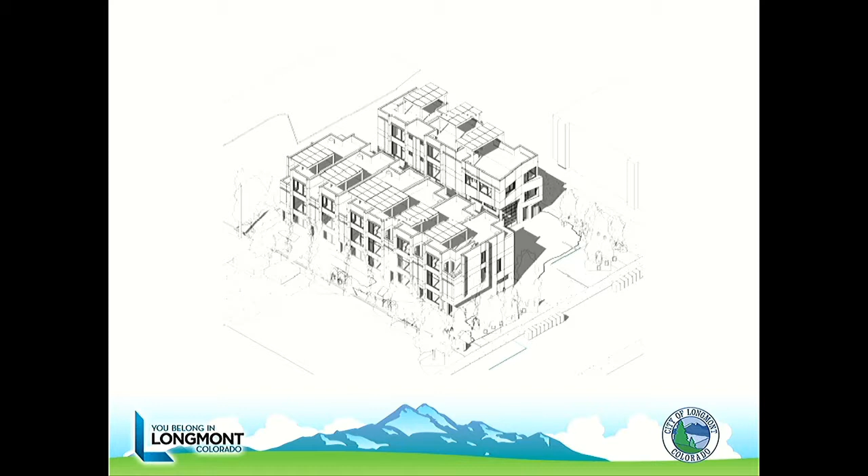For commercial developments adjacent to residential uses, a 20-foot landscape buffer is required, and they're required to be landscaped with 1 tree and 5 shrubs per 500 square feet. The applicant is proposing a 4-foot landscape buffer adjacent to a 3.5-foot walk to include 6 skyrocket junipers in the buffer. No shrubs are proposed in this buffer.

If built to meet code requirements, the landscape buffer would be 23 feet long by 20 feet wide for a total of 460 square feet. Total number of trees and shrubs required if built to code would be 1 tree and 5 shrubs.

The applicant is seeking a modification to the landscaping requirements based on the City of Longmont Land Development Code, modifications of infill development, redevelopment, and changes of use. The code reads as follows: the decision-making body may modify applicable scenic entryway overlay standards, mixed-use district standards, river, stream, and wetland setbacks, common open space, landscaping, off-street parking, and residential and non-residential design standards in this development code for infill development, redevelopment projects, or changes of use where the applicant demonstrates and the city determines that the modification of a standard is appropriate, desirable, or necessary and can be achieved without detriment to surrounding properties or neighborhoods.

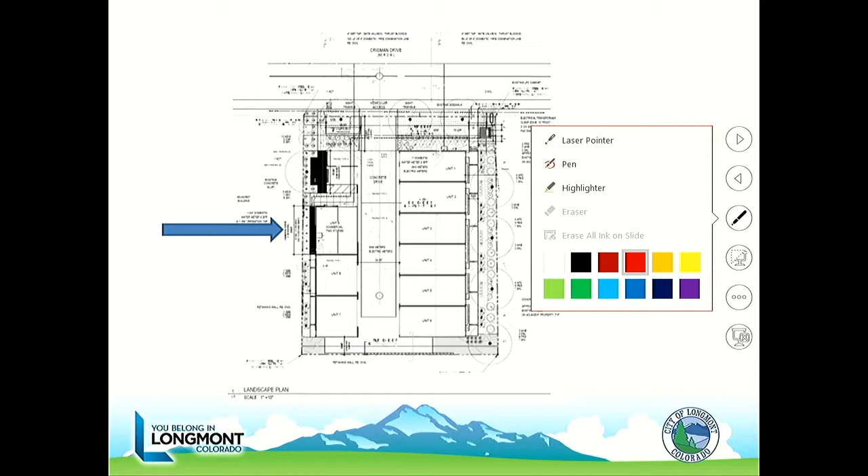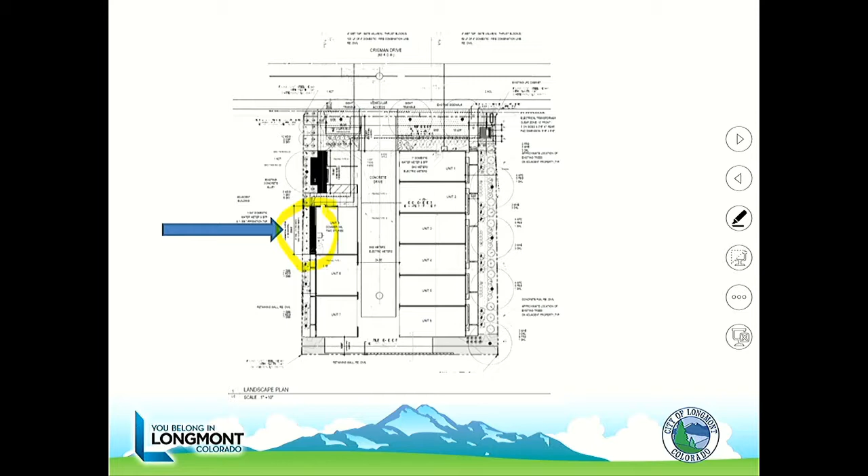So the blue arrow points to the commercial area of the landscape buffer in question. Let me just pull this up real quick. So it is this area in here. And so if the commercial space was residential, based on our current code, there would be no landscape buffer requirement adjacent to other residential. It's just something to consider.

A number of referral agencies were notified of the project. They're listed here: St. Vrain Valley School District, CenturyLink, Xcel Energy, Comcast, Parker Place Condominiums, and the Regional Transportation District. We only heard from Xcel Energy, and their response was that the developer has to complete the application process for any new gas service.

At the neighborhood meeting, there were 3 members of the public that attended. Questions ranged from pricing of the units, general layout of the proposed development, snow removal, whether pets would be allowed, and exterior materials. I don't recall hearing any negative comments associated with this project. Subsequent to mailing out notices of the development application to property owners within 1,000 feet of the subject property and then posting the property, staff received no comments from the public.

The Planning and Zoning Commission is the decision-making body for this application, and the choices for the commission are as follows: to approve the Mark II Crisman Condos conditional use site plan and modification to the landscaping standard without conditions, finding that the applicable review criteria have been met as reflected in PZR 2018-10A. The second option is to approve the conditional use site plan and modifications of the landscaping standard with conditions, finding that the applicable review criteria have generally been met, but require conditions of approval to fully comply with the criteria, as reflected in PZR 2018-10B.

So we're excited, we do cool work. That's what those were. Now onto this project.

So Ben kind of set us up where we're at. This is a newer picture with the other Crisman apartments, and this is one in color of what it looks like. We'll talk about the landscape buffer and show you kind of what we're doing and why we're doing it.

Some of the exterior materials—we're going for a more modern look. We're going to use stucco on the outside, then a nice Hardie board and black windows. We think that will look nice. Then board and batten for the commercial, and some stone to soften it up. We think that will also work nice.

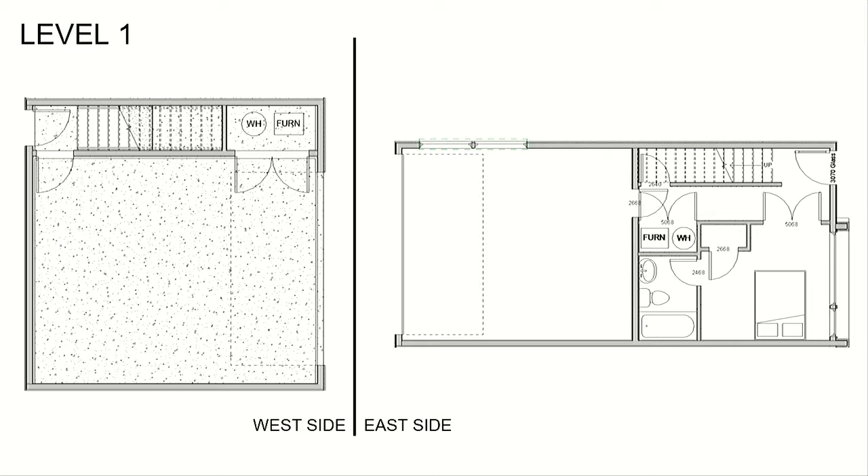So here's a floor plan. The floor plans probably don't matter for this meeting—this is my first time doing this. If you want me to talk about floor plans, I can, if you want to live here. I'm getting head shakes no, so I won't go into the floor plans.

But one of the cool things that I think is warranted in this project is that we will have a rooftop deck, and we think it'll be a great place for everyone. We designed this as if we're going to live here, not to do things weird, but to make sure we brought it up to the standard we wanted. So we'll have solar panels on there.

You can grow—this is a very diverse community. Lance is into growing gardens, so you can grow up there. And then gas-only fire, so it doesn't get out of control, so you can have a nice evening up there. Longmont and the mountains are such a beautiful place, so we wanted to take advantage of that. So there's the exterior.

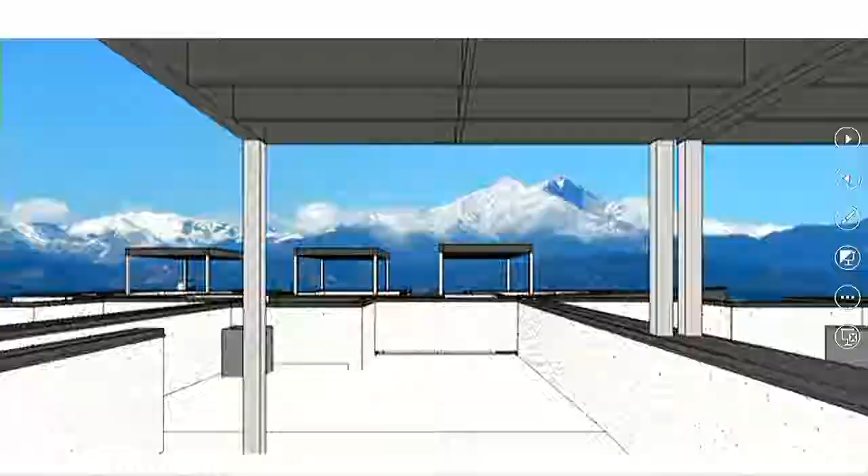Now, the review criteria of why we're here. The first two are—we're consistent with basically all the codes besides these two things we're talking about, same with the design standards, which is B. And number C, I think, is key: that we're consistent with the intent and purpose of the zoning. The timing of how the future code works out, I think, backs us up a little bit.

As you can see, the scale of what we're putting there is not really overpowering anything. Compared to the neighbors, it's a small site, so we need to fit in there. This is a commercial area, and one of the reasons it's been vacant for a long time is not only because it's on a side road, but the width is actually half the width of most of the other commercial areas.

So to make any sort of use work there, I don't even know what you'd put there—a Hardee's, probably not. An office space, you'd probably just have a whole bunch of parking in the front because you can't really get around it, especially with the buffers. If you had a 20-foot buffer, it's a difficult site. So to make this work, we combine commercial and residential.

So this is a picture of our lot. This is where the buildings would sit. And talking about the landscape buffer, our building, if you're looking at that screen, is on the right with the commercial. And what we're separating is the residents on the right with ours.

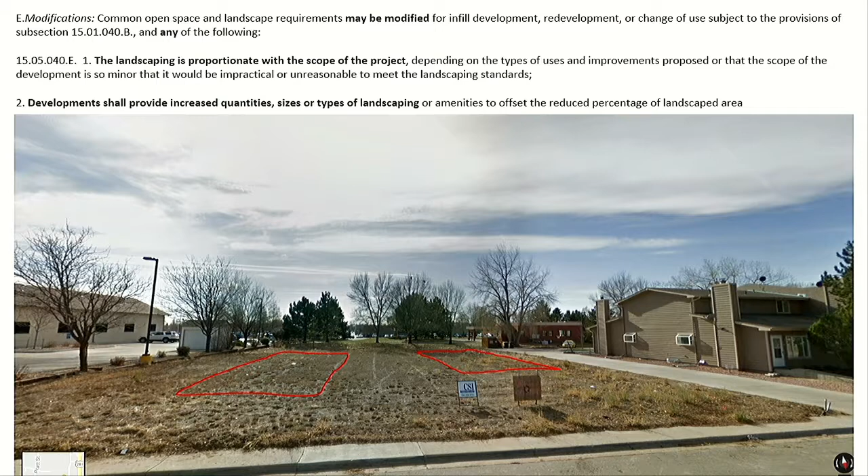We understand the purpose of a landscape buffer, especially if you're putting some sort of office building, you'd want some sort of buffer. What we did to mitigate that is bring the scale down. It's not a huge commercial structure there. It matches with the size of the residences and doesn't really overpower it.

The second thing we did, and this actually came from the review process, they have a landscape architect reviewing it, and he said why don't you put a bunch of juniper trees there so they would shoot up. We actually thought it was a really good idea because I'll show you a picture in a little bit. I think it's going to make for a cool look.

So basically what we are required to do is 1 tree and 5 shrubs in this area. Instead, what we did is we put 6 trees in there, but they're smaller.

Now if we talk about the code, in my interpretation, and trust me my interpretation is not always right, when you have a buffer, on the right side of the page there's a 10-foot buffer, and that's coming from the parking lot on an adjacent property because we're an infill site. So because they already built, we have to put a buffer on our property.

Now buffers, you have to have landscape in there, but obviously you could cross roads and pedestrians in there, that's allowed. So buffers may be interrupted by necessary pedestrian and vehicle access. So the only thing between us and that other building on our site is vehicle access.

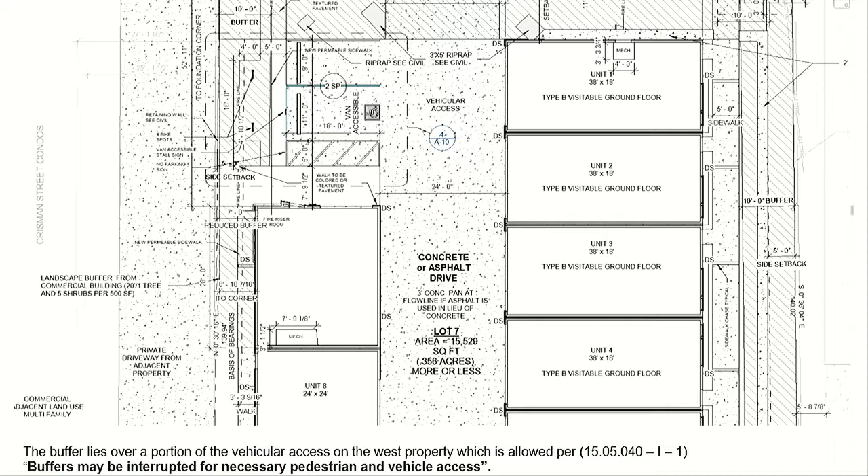Now this is sort of a tricky situation, and I think that's why the new codes came out. So let's go through the new codes. Here's a picture of what it's like without vegetation, and then here's what we're going to do.

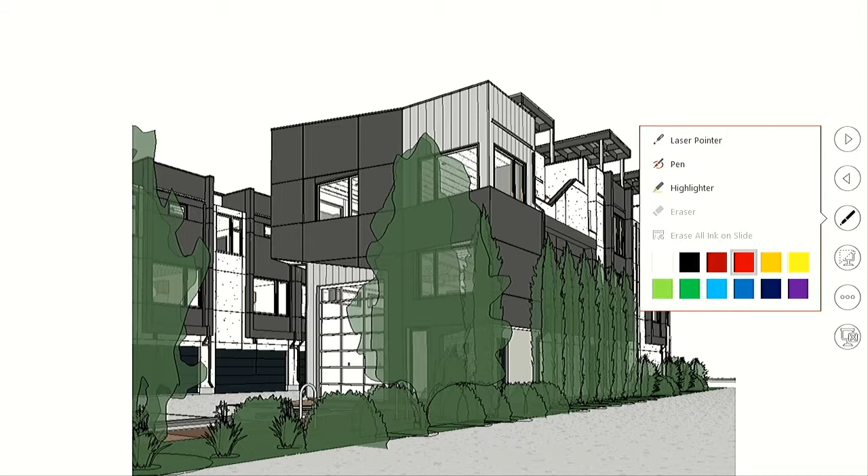So in front of the building, let me point this out. This 1 tree and 5 shrubs is normally what's required over here. But we actually think it looks better with these 6 skyrocketing junipers.

You'd have a nice feel walking through the space—you know, I'm an architect—walking through the space, it would feel really nice. I think it would look even better from their property and just enhance the neighborhood, actually.

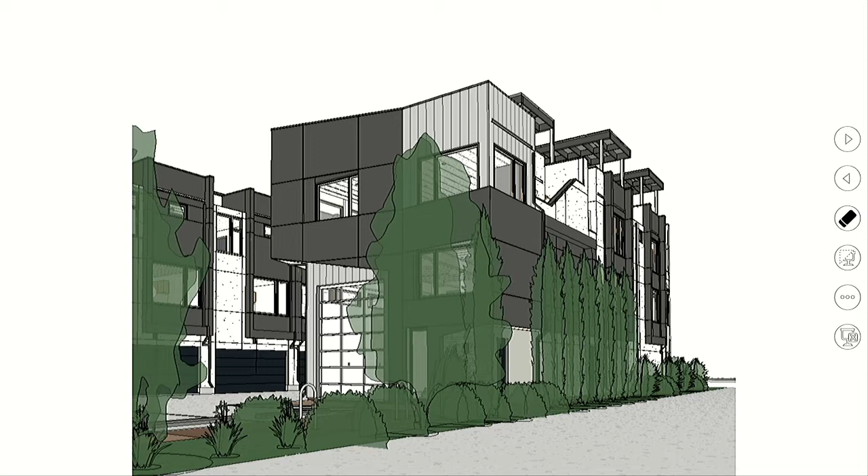So in that area, the buffer is the setback. So the future buffer would be 5 feet. We have 7 feet, 5 feet is fine. And that's what's saying that A is matching it.

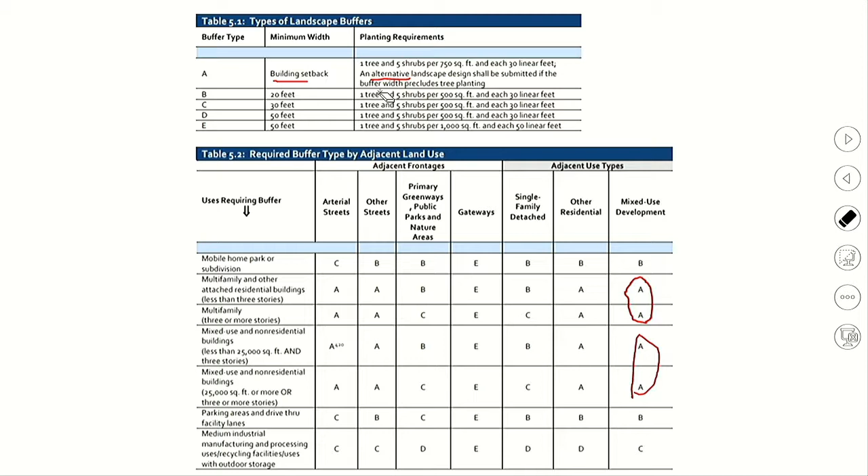And then an alternative landscape design shall be submitted if the buffer precludes tree plantings. So it's again giving that flexibility, the flexibility that Ben talked about with the codes, that there are these modifications for infill sites, because not everything's perfect in an infill site—you've got to work with whatever's around you and the width and what you've got.

And the city response is that it's proportionate with the scope of the project and increased quantities of landscaping. We also put a lot of trees and vegetation here because it's going to look really good.

The other review criteria is that it does not significantly adversely affect the surrounding properties. I don't think it does. I think it enhances it, especially because it's just a lot right now. And then the draining is the other issue too.

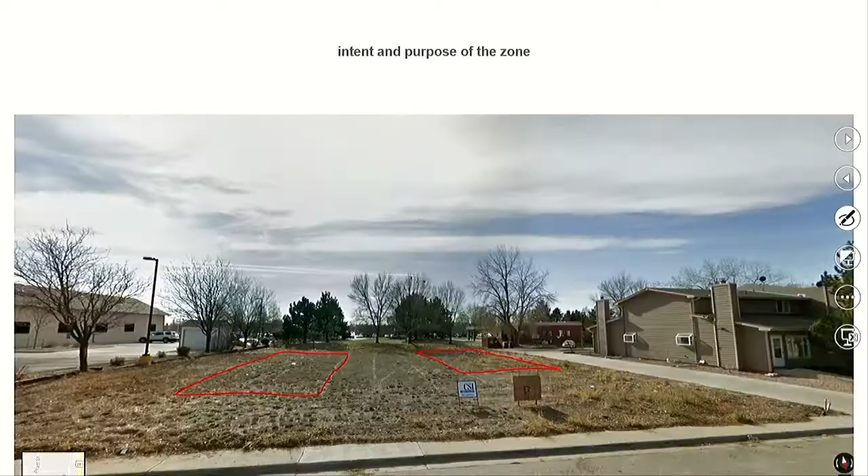Right back here is where a lot of our water flows, this way, normally without any of the buildings going there. And the problem is that down this way, everything kind of pools up, and it's not a great place.

So we had our engineers redesign it so that less than what is historical actually drains this way, and the majority of everything goes out this way. We're trying to improve it because we don't want bad neighbors, and we feel like it'd be terrible to add more water than what's already happening.

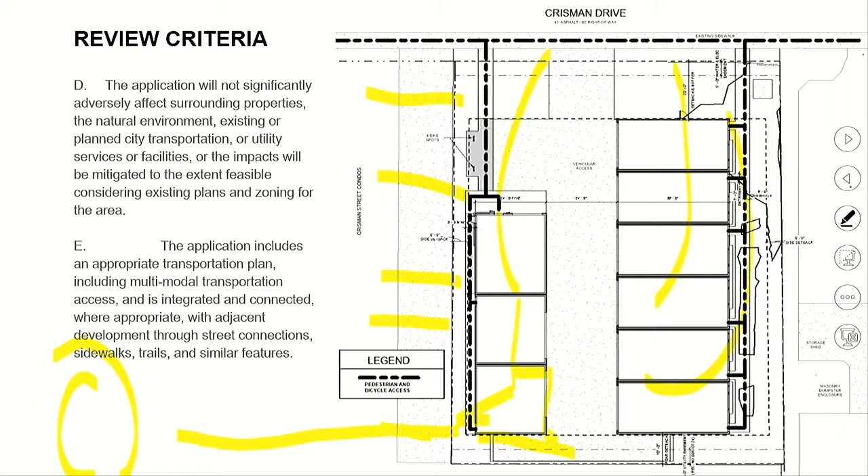The engineers met with the city staff, and we have the new drawings. Ben is going to say, do this and make sure it doesn't happen, and we've done it. Then they'll review it and say yes or no. But since they had the meeting, I'm pretty sure it's going to work out. And that's it, that's all I have.

So I'll take any questions, and then we ask that you guys approve it unanimously. All right, thank you, Mr. Gore. Commissioner Flagg.

My question is in regards to the structures on the roof. You have the structures on the roof, and I assume that at some point people are going to want to be in those structures. Will you have lighting up there? I'm assuming they're going to need lighting. My concern is that the light they would need on their private space would not intrude on adjacent properties by being either too bright or misdirected, and how will you manage that?

That's a great question, and I think we'll have to write it into our HOA and maybe even provide downlighting, so that you cannot add more light. If we provide no light, then we're just going to be chasing them all the time, telling them to take down their lights. If we provide some light and make sure it's the right light that doesn't spill over, then the rule is you just can't have additional lights out there. I think that's the way we'd solve it.

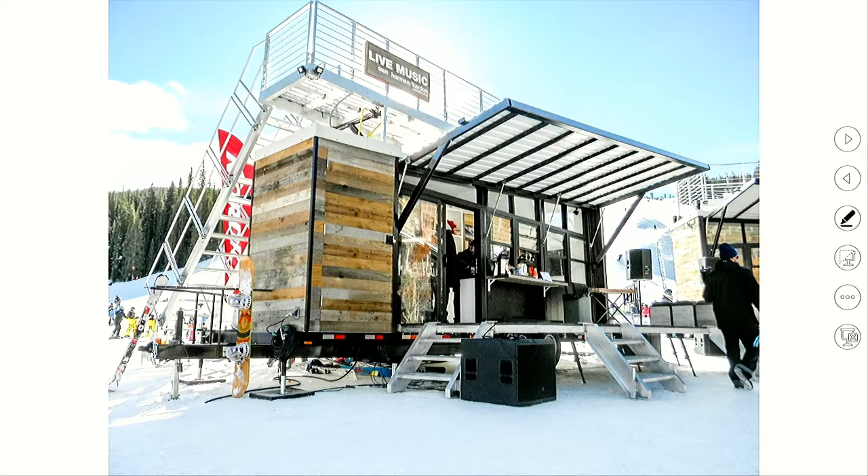Then we did one - we can't mention the company, but a big Fortune 500 company said, hey, could you do that but on steroids? So please make the deck all the way big and fold up, the whole length fold down, make a sky deck on hydraulics, and make the railings fold in so we can pull it. That one was absolutely nuts - I just had a baby during that one, so my wife was not pleased.

Hold on, go back. Go at the same pace, even through these ones.

Thanks. Here's the new site - this is what it's gonna look like, essentially. We're using some good materials. This is Lance's house in Longmont, so the best contractors we found from his house we want to use again because they're local and we know which ones were good and which ones were bad.

For stucco, this is honestly amazing stucco work - the precision in detail is awesome, and I think they were just in our office this morning. Here's some of the exterior sidings - that stone is just a nice entrance, and with the board and batten, it's kind of like a country modern feel. But that's no longer new.

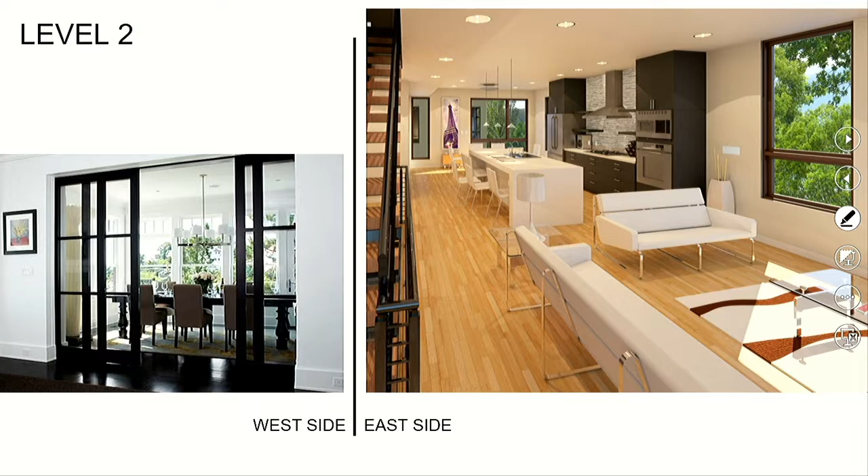That's happening. And the floor plans, which we think are also very cool, because you could shut this off and have it when your parents come - you could have them in there because it has a bathroom, but it could also be your dining room, so it's kind of dual use. Again, using space smartly, and then two bedrooms upstairs for each one. And then there's obviously amazing views.

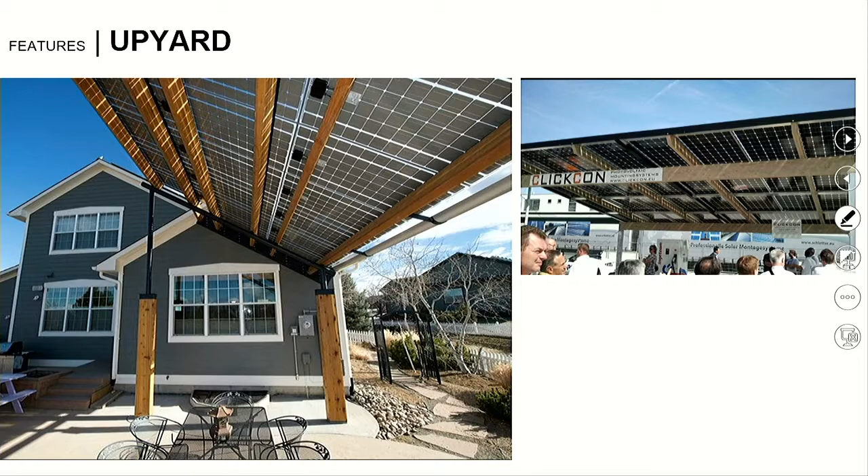But you need to be shaded because it is hot - it really was hot today. So we're going to shade them with solar panels, two birds with one stone. The solar panels have to be below the utility power rating, or else we can't do it. And then obviously gardening is super fun - I don't know how else to say that.

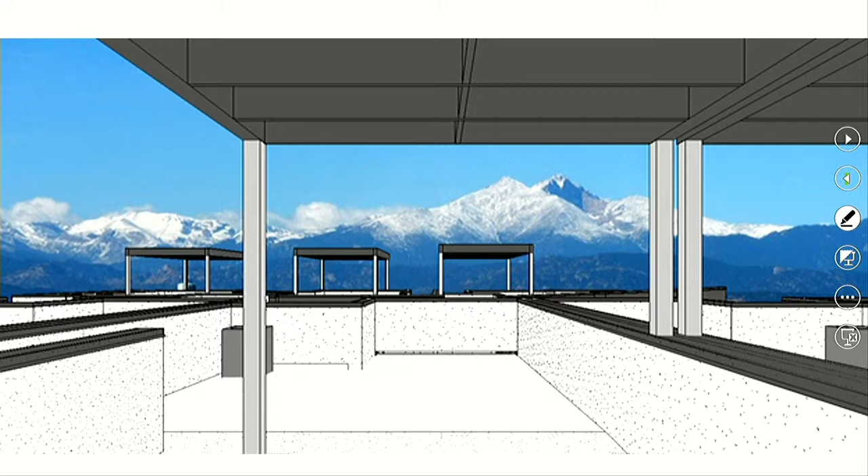We have a gas line going up there too, because we think it would be awesome. That's why, and we think we can do it. And then here's your view. Hopefully right here would be your tomato garden, maybe some pots with more, and then you'd be sitting here high-fiving your neighbor.

In that first project we showed that we did in Lakewood, they said the rooftop community is huge because everyone can talk to each other. It's not traditional suburban houses, which I live in, which are totally fine - you're in your backyard. We didn't have fences when I was a kid, but apparently there's fences now, and I don't like it, I want to tear it down. My wife says no. But everyone just says it's like hanging out, and people are really getting to know each other. So yeah, those were the views.

Thank you, that was really helpful. Commissioner Height.

We did consider putting it on that side, and there's a couple of reasons why we didn't. If we look at the bigger picture and zoom out, right here is this open space. Good urban design connects it with our portion of more open space by having the smaller building here and the larger building on that side.

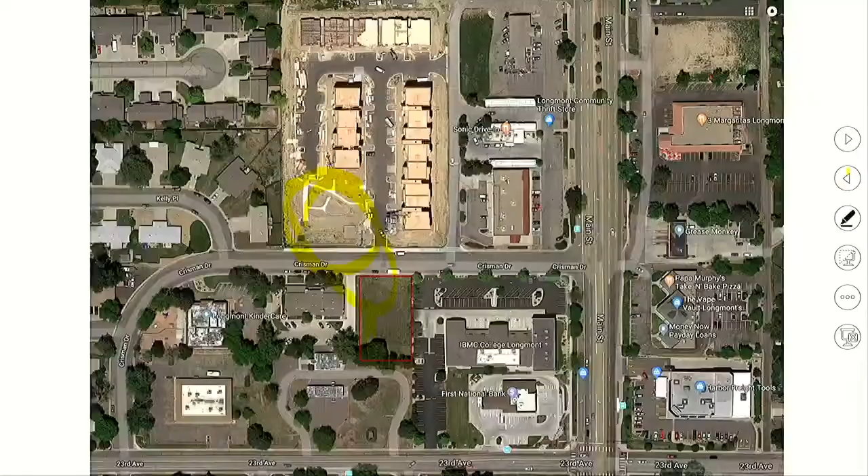Secondly, if I go back to the site plan and zoom in. If we flipped it, what would happen is because on this side there's a 10-foot buffer from that person's property that we have to abide by. That means the best selling units and the best entrance wouldn't have that same buffer, because it'd have to be extremely close to this side, so it wouldn't even have a buffer. It would just be front lawns looking into a parking lot instead of a nice landscape area.

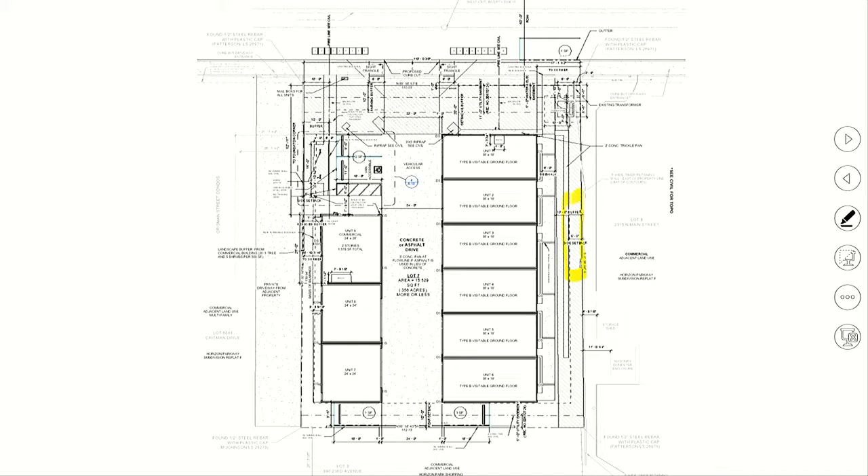So if we have to do it anyway on that side, let's utilize that space. The third reason, which I also think is a big one, is that if you flip it, there's more rooftop and more building on this side, and if it goes over here, that means more water goes onto this person's property. We don't want to do that either. So those are the three main reasons.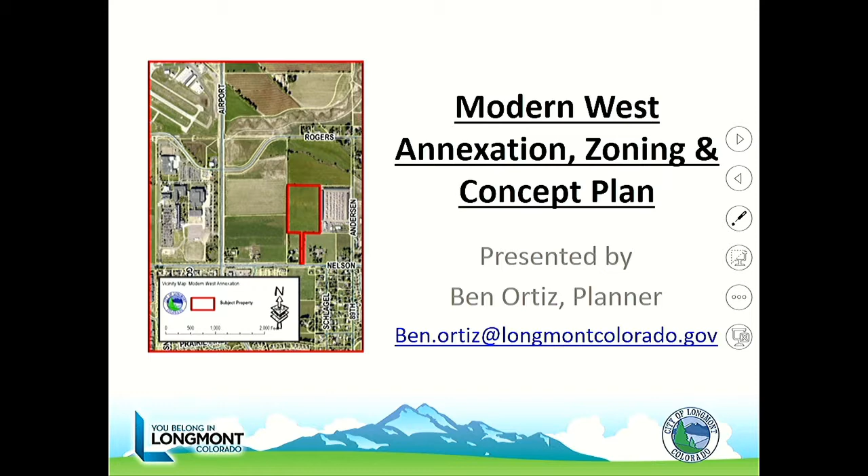So a traffic study did conclude that Modern West would generate a little under 800 trips per day. Based on that traffic study finding, the proposed collector will need to be constructed from Rogers to Andersen, and any portion of the collector not constructed by the time Modern West develops would be required to be constructed with the Modern West development.

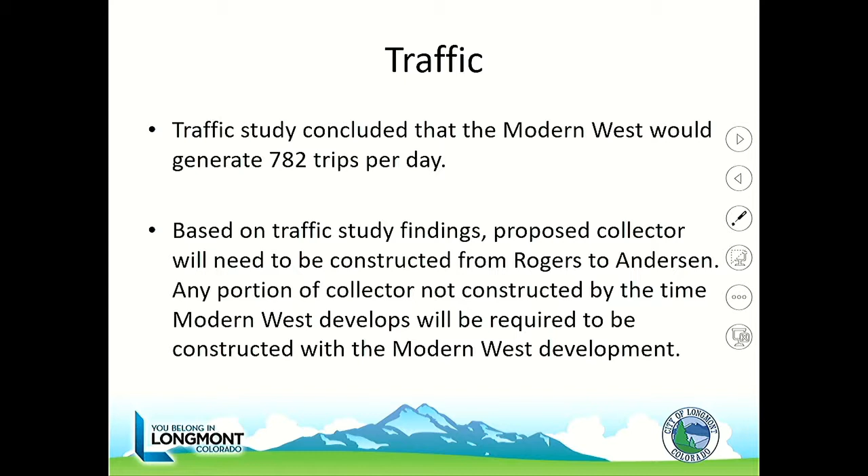So the Ecological Resources Survey identified that there were no threatened or endangered species or obvious habitat seen on the site for endangered species or threatened species. There were no wetlands or waters of the U.S. subject to Section 404 of the Clean Water Act, and there were no prairie dogs observed on or adjacent to the property.

So we sent referral packets to a number of different agencies, including CenturyLink, Xcel Energy, the Airport Advisory Board, City of Longmont, the Airport Manager, Federal Aviation Administration, Boulder County Land Use and Open Space Department, Boulder County Transportation Department, Mountain View Fire District, Longmont Economic Development Partnership, Longmont Chamber of Commerce, U.S. Fish and Wildlife Service, and the Colorado Parks and Wildlife Service.

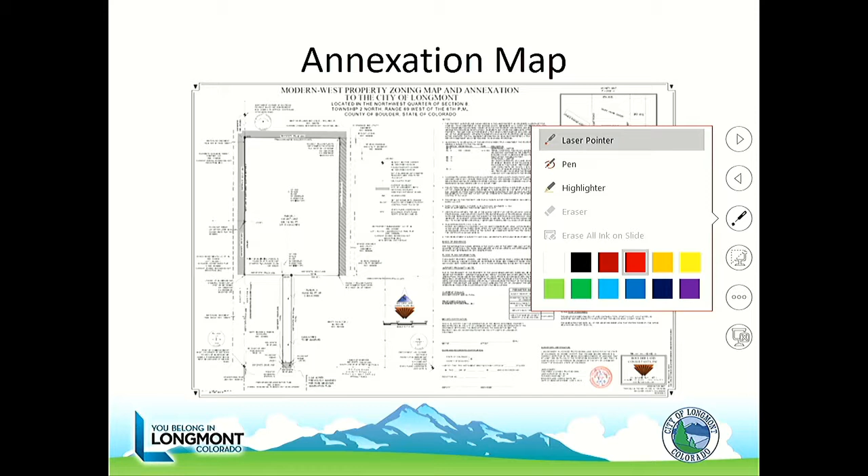The shaded portions of the annexation map show where the proposed annexation is contiguous with other city-owned parcels. Let me show you - there would be this portion here, and this portion down here. State law requires that at least one-sixth of the property to be annexed be contiguous with city property, and as you can see by this map, they've met their contiguity requirement.

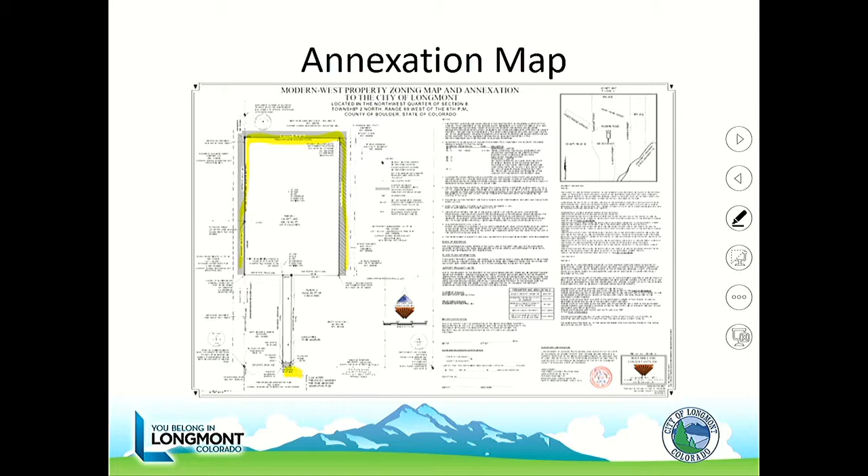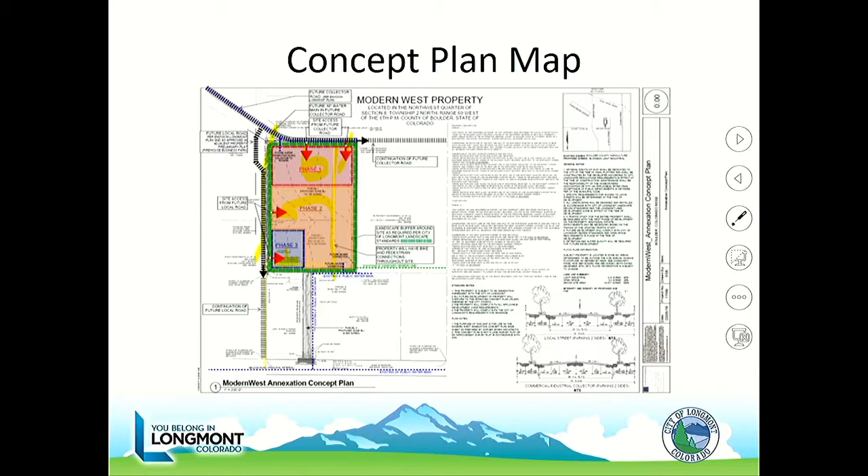The Planning and Zoning Commission is the recommending body on this application. City Council will be the decision-making body. Planning and Zoning Commission options are as follows.

Recommend approval of the Modern West Annexation Zoning and Concept Plan without conditions, finding that the applicable review criteria have been met as reflected in PZR 2018-9A. Recommend approval with conditions, finding that the applicable review criteria have generally been met but require conditions of approval to fully comply with the criteria. Or recommend denial of the Modern West Annexation Zoning and Concept Plan, finding that the common review criteria for all major and minor development applications and/or review criteria for annexations have not been met.

Staff recommends that the Planning and Zoning Commission recommend approval of the Modern West annexation with the following conditions: one, any remaining staff-related changes to the plans are made. By and large those are complete, just in case we've missed anything, I stuck that in there. And second, the applicant shall be responsible for the construction of any portion of the east-west collector street that has not been constructed at the time of the Modern West development.

That concludes my presentation. And the applicant is also here and is prepared to make a presentation. Great, thank you, Ben.

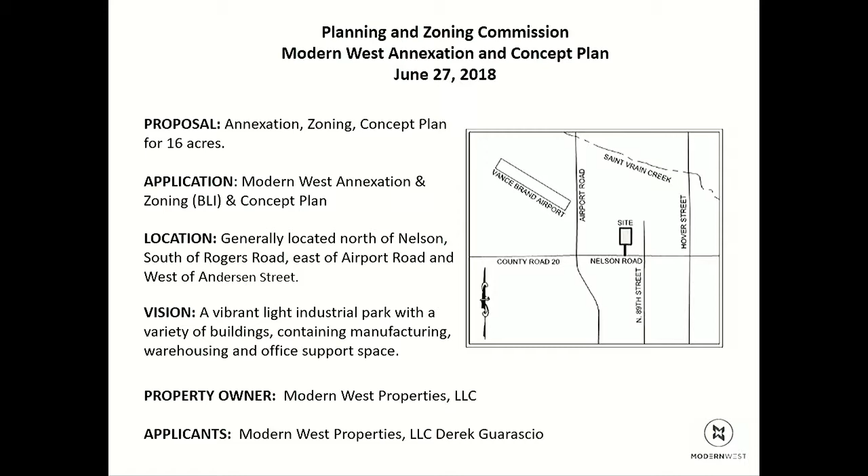I have a little bit of duplication on Ben's stuff, but I'll try not to do much. Generally, you know where we're located. We are looking for an annexation and concept plan. This applicant's vision is for a vibrant, light industrial park with a variety of buildings containing manufacturing, warehousing, and office support space, which is consistent with the BLI zoning and will be consistent with the mixed-use employment zoning as the new code is adopted.

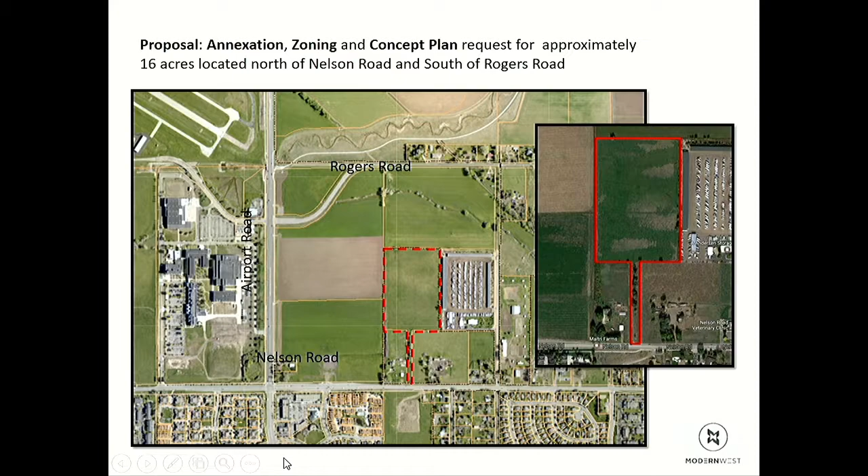Again, this is where we are in the world. This is Andersen. This is the Williams annexation. We had a conversation about the firehouse storage on this site here. This is Macy's, and these are those two Boulder County agriculture pieces to the left. And Ben said the land is vacant. It's pasture grass, so be careful about calling it vacant land - it's farmland at this point. And that Peck ditch runs along this edge here. Airport here, and you can see the airport advisory on the zoning map.

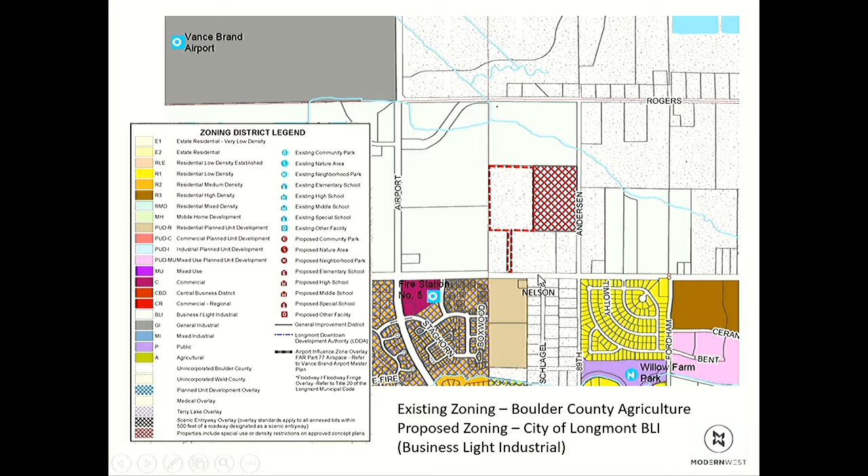Again, existing zoning around us. This is all BLI. This is Andersen. So we're consistent with that zoning as we move forward. Here's unincorporated Boulder County. We are consistent with the comp plan, and this is the map that shows that. This is a property in mixed-use employment, and specifically these uses that were contemplated are set forth in the mixed-use employment overlay. Again, we meet the contiguity requirement of one-sixth for the annexation. We're pretty much an enclave when you look at that part of town, so it makes sense for this to be incorporated into the city and develop inside the city limits.

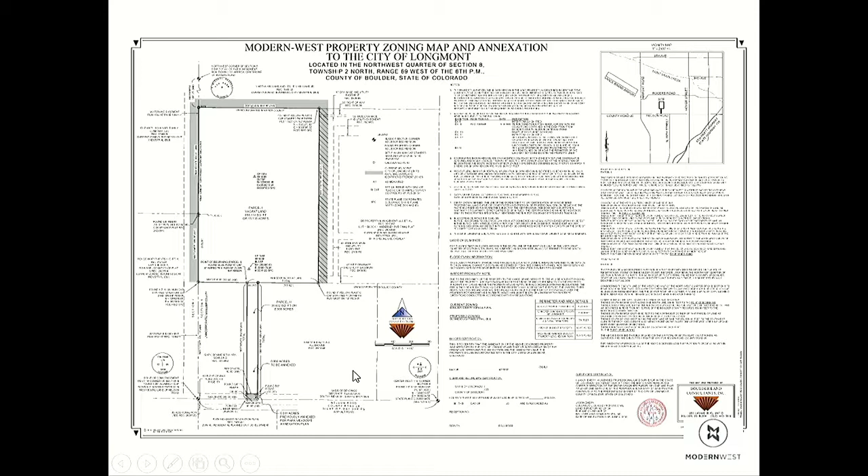Our annexation, our concept plan - this says 60, it should say 80 to add up to 100%. 80% is light industrial, 20% will be open space. This is that road that's going to connect up to Rogers and someday across to Hover Road. So that's the collector, and this is that local street. And that ditch runs along this edge of the property. Everybody understands that the ditch company needs to continue to operate, and we have to work with them through the process. And the adjacent neighbors, I don't know why they think they haven't been contacted, but we did send notice as required as part of the process. And the only people who came to the neighborhood meeting were the people who own the Firehouse Business Park property. So we did reach out to them. We can reach out to them individually as we move forward through preliminary plat.

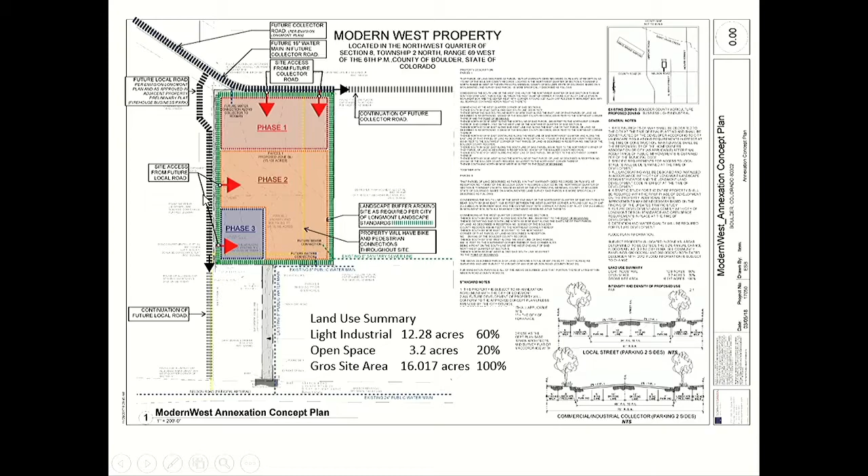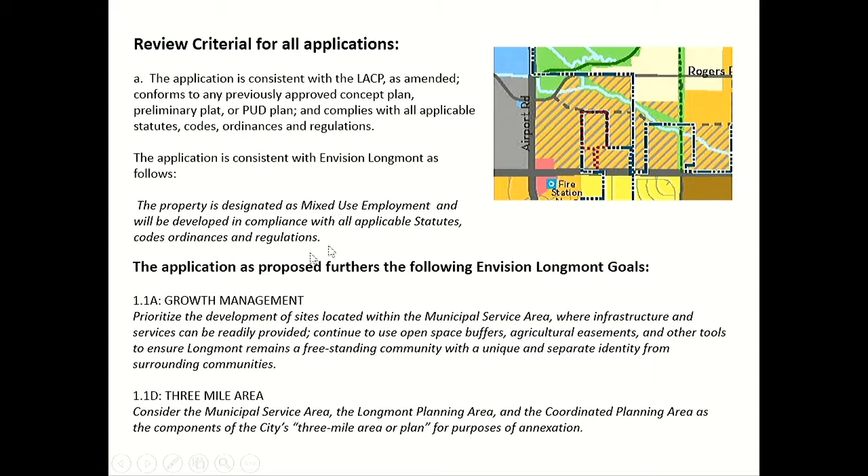Review criteria: we are consistent with the LACP Envision Longmont. The property is designated mixed-use employment and will be developed in compliance with all applicable codes and standards. There are a few other Envision Longmont goals that this property furthers. Growth management says grow within the municipal service area. We will, as soon as we're annexed, be within the municipal service area and within the 3 miles. Basically, utilities are at or near the site, and the existing transportation infrastructure is at or near the site.

The development types plan for a combination. This is undeveloped property, but if you look at the neighborhood out there, it really is kind of infill. When you think about it that way, it'll fill a need for flexible space. You saw the letter from Longmont Economic Development Council that high-ceilinged, smaller space with flexibility is lacking. And this applicant has that vision for interesting architecture and a mix of uses that we're really excited to bring forward to you if we get through the annexation process, that preliminary plat with a little more detail.

Our architect, Erin Bagnell from Sophus Barn, was unable to be here this evening, but when we're here talking about the architecture, she'll be here to talk with you.

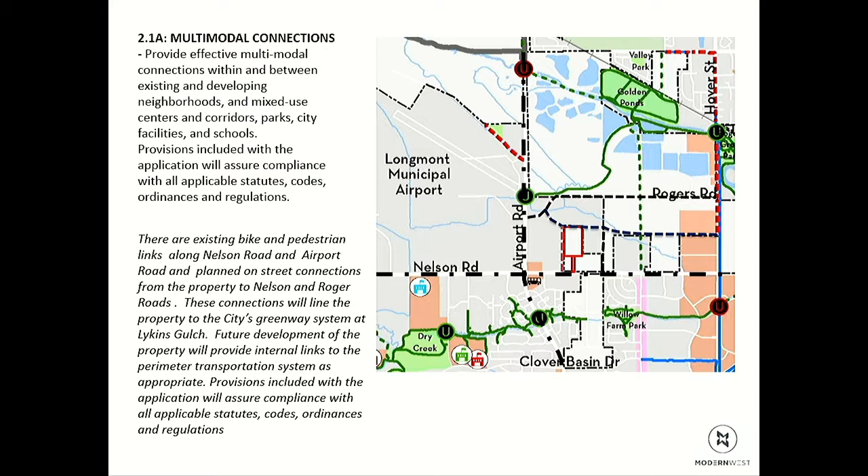We will provide the right-of-way for future connections, both that collector along the north side and the north-south. We have some pretty consistent integrated connectivity in the neighborhood. Again, Nelson Road, there's transit at Nelson and Airport. When we put this connection in, it gets us up to Rogers, which gets us into Lykins Gulch, which gets us into the city's greenway system. There are off-site bike trails, both on Airport and Nelson, and there'll be internal pedestrian connections on the site.

The airport - I learned a lot about the airport the last time we were here and having a conversation. The city code is very, very specific about what can and cannot be built in that approach zone. Condition is okay, but the code is very clear. As we move forward through the process, the code will rule and require us to make sure that we are consistent and not penetrating that surface. We're a long way from the airport, so I don't think it's going to be an issue, but we'll actually do the analysis at the time we do our preliminary plat and have our buildings designed, so we'll be able to tell you that specifically.

There's a goal about workspaces, and this is that kind of deal where we have overhead doors in the back, office space in the front, an opportunity to have manufacturing or warehousing or some combination thereof. So we fill that niche that is missing in our system right now.

Application complies with the design standards. Again, we're at the very beginning. We don't see any exceptions required to develop this property. We have the required space to do what we need to do, and we'll be back with a preliminary plat that meets those standards, and we can serve with utilities without issue.

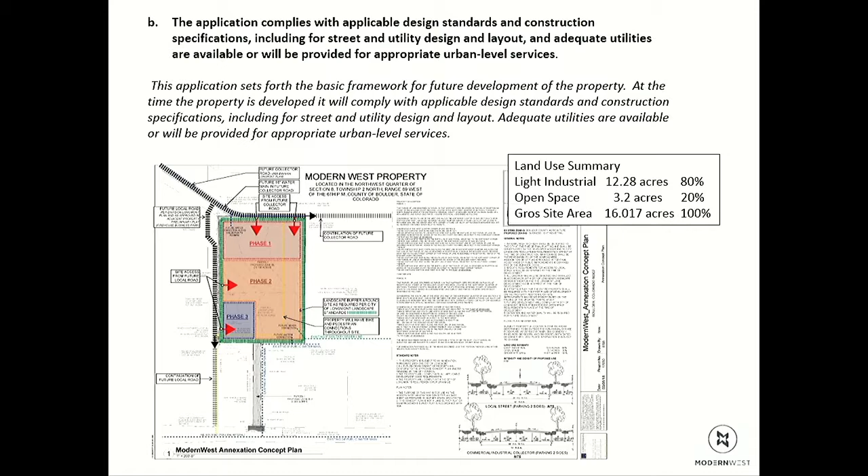We're consistent with the intent of the zone. It's BLI, and this is BLI written all over it, and mixed-use employment written all over it. It's manufacturing, warehousing, light industrial, office support space - that's what the BLI zone was set up to do, and this project envisions that moving forward.

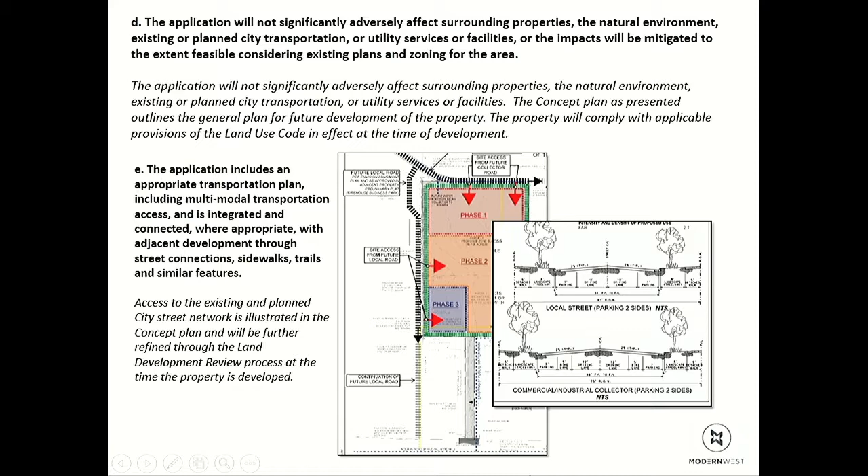We don't anticipate any adverse impacts on the surrounding properties. The only place we have a little attention to detail will be along this side. The houses for these sites are pretty close to Nelson Road, but there will be a landscape buffer here. The rest of this area is also BLI, so they fit together. It's not like it's a use that's out of pocket for those things.

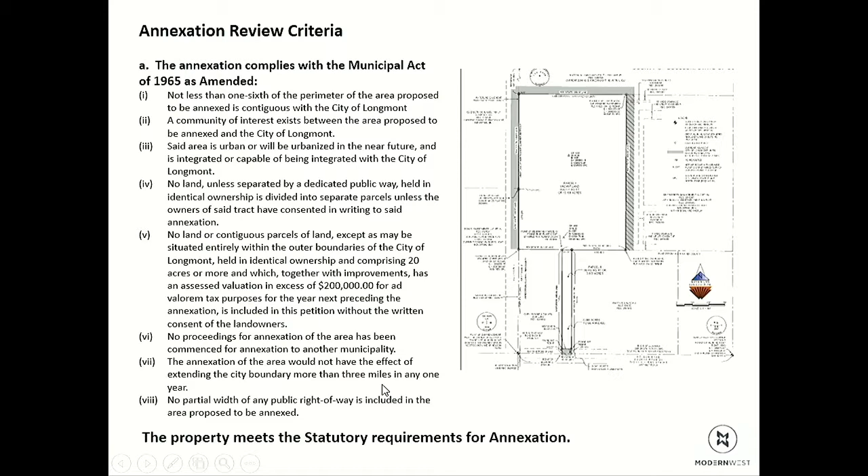We meet the criteria for annexation under the Municipal Act, contiguity, and the community of interest. All those statutory things are met for this application.

Again, we talked about the LACP and the municipal service area. The zoning is appropriate based on the comp plan and the mixed-use employment zone. The BLI is actually talked about in the Envision Longmont as part of that case. I think we're going to help integrate the surrounding properties into the neighborhood by building those streets, so we'll be a piece of that transportation network so we don't limit integration in the future.

We have no vested rights associated with the property, so there's no issue with that. As Ben said, we had a phase 1 environmental assessment, no issues were identified. We had a species and habitat evaluation, no environmental resources identified on the site. So I think we're consistent with those things.

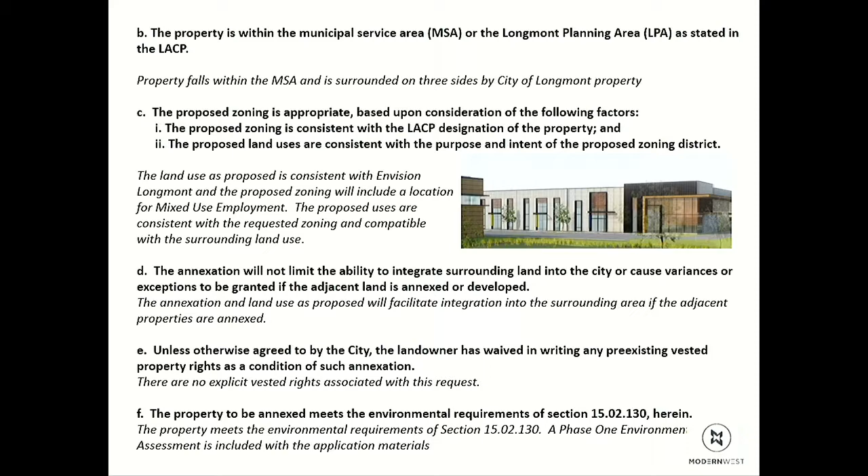Concept plan criteria, same thing - are the uses appropriate for utilities, transportation? Again, streets, there's a sewer line here. The applicant will have to build water lines and all other infrastructure required, meet the standard for drainage and all those things. We're pretty much at the front end of the system, so we'll give more detail as we move forward.

We have not identified any adverse impacts to the environment. We'll meet the drainage, water quality standards, and all of those things that go through the process. This applicant is also looking into energy conservation measures that can be integrated into the process.

And as we get further along, if you choose to let us annex, as we get more along in the process, that'll come back in the next phase of the development. We're here to answer your questions and ask for your recommendation for approval. That's my 10 cents, thank you.

Thank you, Ms. Brunk. Any questions for Ms. Brunk at this time? I don't see any.

This is a public hearing item, so we'll open up the public hearing. Nobody has signed up to speak about this, but if there's somebody in the audience who'd like to come forward and tell us what you think, we'd love to hear it. Seeing nobody stepping forward, we'll close the public hearing.

We'll go back to comments and questions from the commission. Commissioner Poland.

Ben, in looking at this, the concept plan is rather simple, just breaking down that they're going to do it in 3 different phases. For an annexation, is that more or less what you usually see?

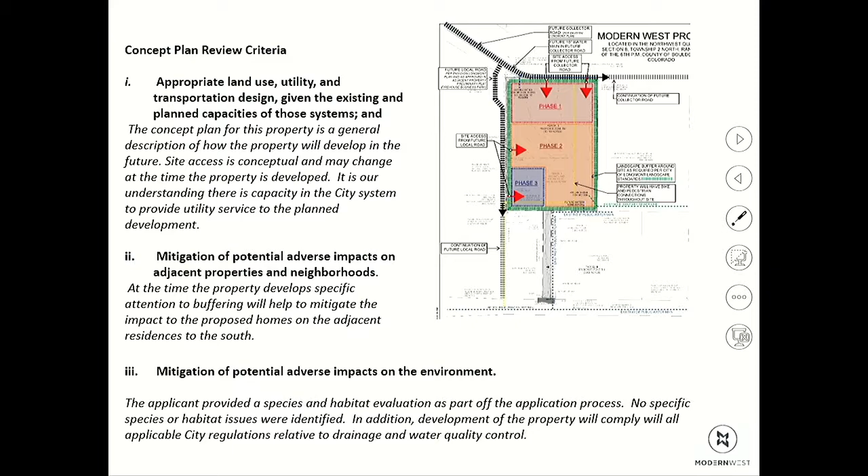Yeah, it runs mostly—the lateral runs along the western property and then turns a little to the east and serves other properties. Again, ditch companies, no question, they have a right, a vested right, we get it. As we move forward in the next part of the process, we'll contact them directly and talk to their engineer, and Todd will work with them to make sure they continue to get service. City code, pretty much a no-brainer from a land development point of view, that we have to let them keep their water.

Great, thank you. I think that's what I was looking for, just confirmation that we will protect the middle lateral and all appropriate access. Commissioner Poland: Ben, getting back to the ditch, is there anything in our regulations that requires them to keep the ditch,

or is this something that maybe we should make a note of in the PZR if we approve it? To my knowledge, there's not any requirement that requires them to keep the ditch. I don't know—are you familiar with it?

I have another hat and represent many ditch companies, so I can tell you that we always get a referral from the city, and nobody moves forward until the ditch company gets with planning staff and says, 'we got it.' So when I have my other hat on, representing the ditch company, and someone's trying to develop over the top of it, we work with them to make sure it works and operates. So it's a referral comment, and in my experience as a ditch company person, city staff has been vigilant about making sure their concerns are satisfied. I don't know if it's a code or a practice, but it always works. So now that they know, they'll also be part of that referral process as we move forward, and I think Chris could probably speak to that too.